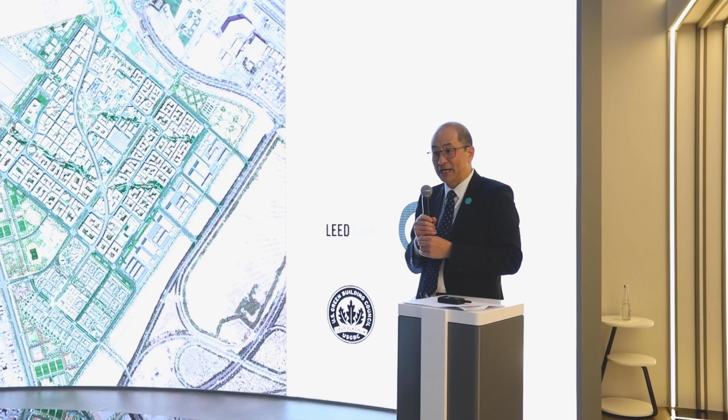City designs are super complex objects, and one can talk about cities in terms of its livability, in terms of its community, a place that is impacting climate change. At the same time, we talk about Masdar City in terms of a business center, clean tech hub, innovation hub, smart centers, all these different things; they all make up what cities are about.

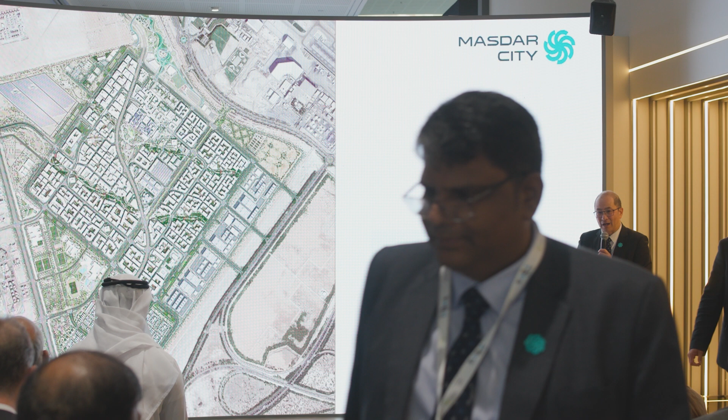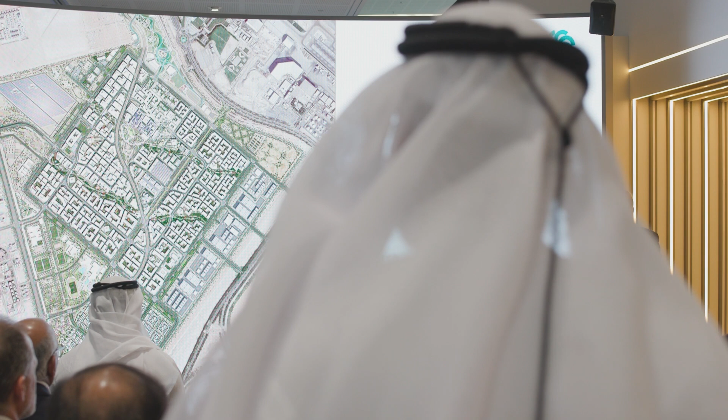Various colleagues earlier today have spoken to many of those points, but this particular presentation is really about one of those dimensions of the city, which is our role in climate mitigation and decarbonization. What I want to do today is go into a deep dive into some of the details, and also talk a little bit more about the way we work and some of our experience, before I go into our actual proposed roadmap to net zero by 2050, and areas where we have succeeded, areas where we are on our way, and areas where we know for sure there are challenges to come.

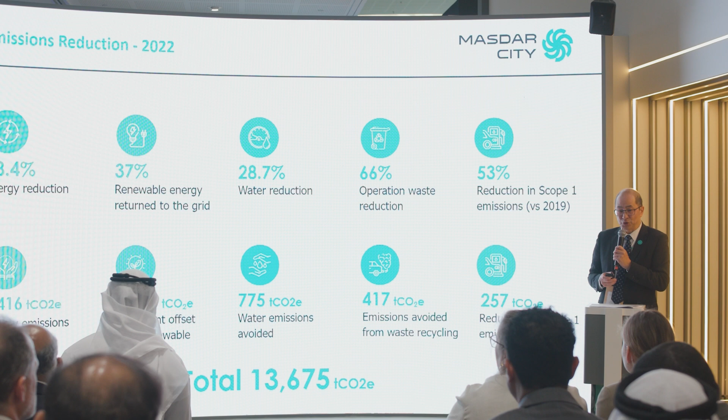So straight into the numbers. This is our actual operational performance figures from 2022. 2023 figures are under preparation. These numbers are available in our ESG report, available on our website for downloading. We run transparent information sharing. Here you see what we're doing with energy, water, and waste mainly.

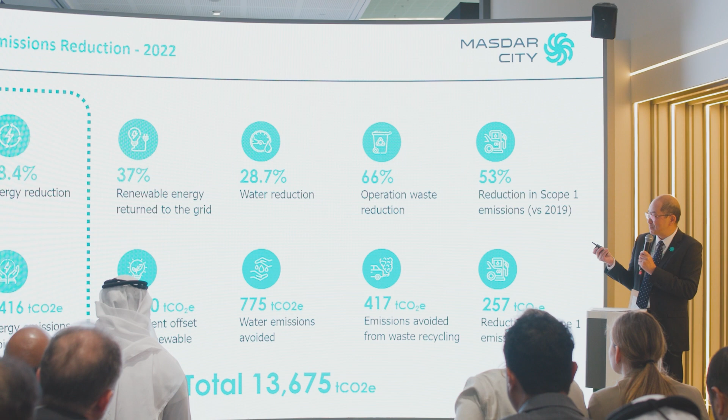But the thing I'd like to highlight is the number related to energy. 7,416 tons is where we have made the most saving. The reverse of that is that it's also where the largest footprint is, and because it's the largest footprint, we can make the most savings. I'm not saying water and waste reduction is not important. All I'm saying is these are the actual measured numbers from Masdar City in these various dimensions.

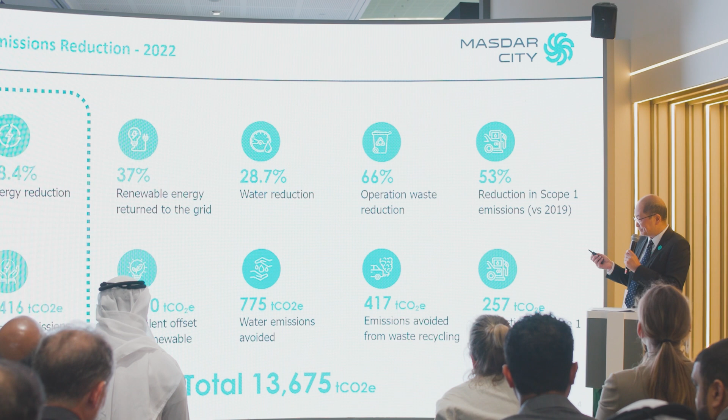What does that energy reduction mean so far? Based on our current portfolio, which is approaching 500,000 square meters of development, we're effectively taking the equivalent of 1,600 large UAE SUV-type cars off the road, just to give you a perspective of what that number means. However, we have a lot of buildings under construction. In fact, we have just finished one net zero energy building, and there's another 12 buildings of high performance under construction, 2 of which are also net zero, which I will show in a moment.

We are in an acceleration stage of development. Before, we were building one building at a time, then we became one project of multiple buildings, and now we're building multiple projects with multiple buildings at the same time. We are really scaling up. With the current construction, you can see that by 2025, our projection is an improved energy reduction and a huge leap in terms of the carbon emissions related to that expanded portfolio.

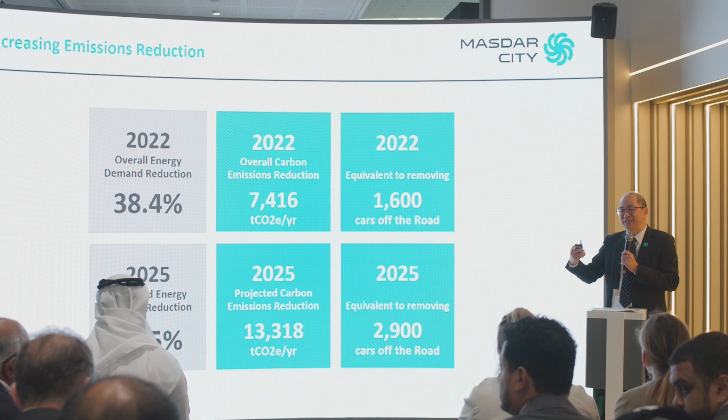The 38 to 45% is a significant number. It doesn't sound like a big number, but the 45% represents our entire portfolio. So you can imagine if you're just adding one net zero energy building, as strong as that building is, you are just lifting up the average of some of our older buildings.

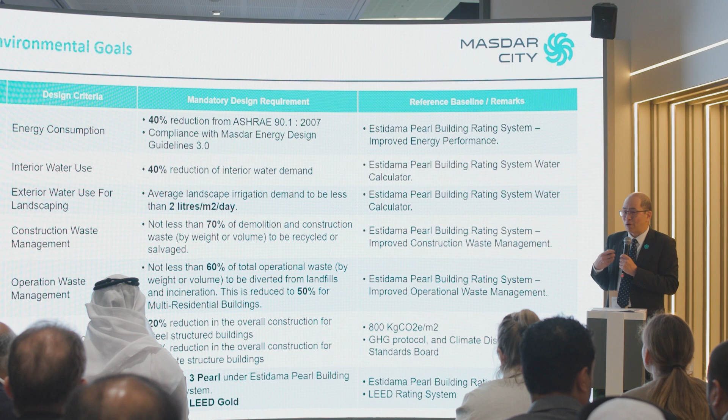Now I'd like to touch on a number of things that are unique, and thank you for being here, because you're not going to find this on any websites. This is a discussion of our approach to design. When you visit Masdar City, you see a large number of buildings. But a large number of buildings is really just the outcome of a process that we have been developing over years of how to build greener.

These are some of the design parameters that we put into our projects in terms of energy, water, waste, and embodied carbon. What's important is not what the actual numbers are; what is important is that you have numbers in the first place. Oftentimes people say, I want to design a greener building, and they design and build it, but because it's such a complex subject, they really don't know if it's greener or not. Oftentimes they improve one thing and something else drops. So you really have to monitor to understand the cross-relational impacts. The numbers are a discipline for us to think about these things, rather than the actual numbers themselves.

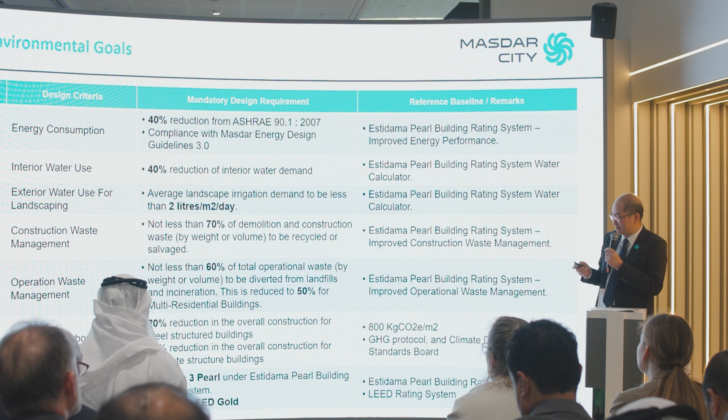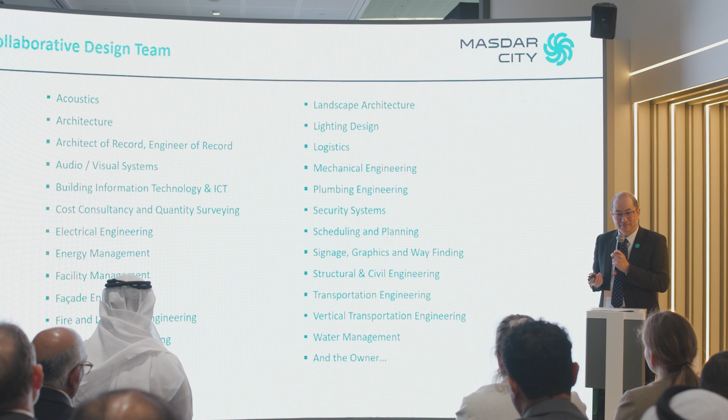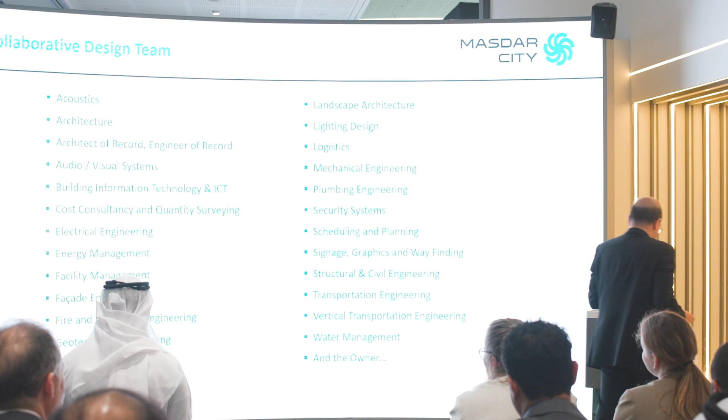So if I had to open up to the audience, which of these disciplines is the most important in the design of a building, excluding the last one here, because I'm the owner representative? Do I have any offers? What do you think? Which one is most important? They all have to be there to contribute to the building, but which one is most important? Scheduling and planning. To start with. Any more offers? No?

Well, the answer to me is a very simple answer. Sorry? Someone said all of them. You're right, they're all important. That's why they're on the screen, because they will have to contribute. But which one is most important? All of them means they're all the same. So the most important one is very simple.

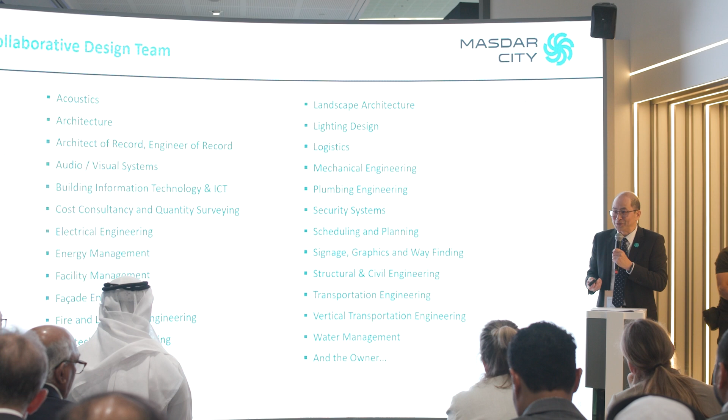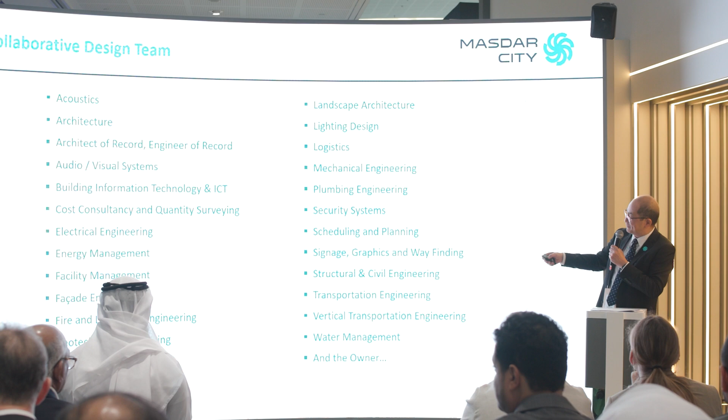It's my one. That's the answer for all of you, because you all believe that your subject is the most important one. It's the one you selected to dedicate your life to, unless it was chosen for you by your parents, which happens in real life sometimes. But in most cases, you choose a subject and you dedicate your life to it, and you're passionate about it. And then suddenly you're in a room with 15 other people who are also very passionate about their subject. And there you have the start of chaos. We're trying to design a building.

And so in order to make a building go green, which actually relies on collaborative and integrated design, you have to figure out how do you get all these people to run in the same direction under a common mission statement. So that is a kind of process challenge that we have to go through.

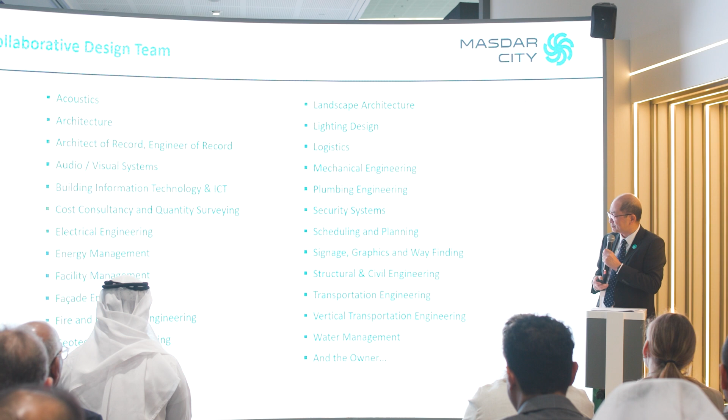The lighting design that you do obviously would change depending on how large your windows are. How large the windows are will determine how much heat you let in, which will impact the air conditioning system, the engineering. Even the shape of the room behind it, even the colors of the walls behind it actually have an impact. But do these people normally talk to each other when they are designing this? No, they don't. And that's what we found as a practical reality.

Yes, they share drawings. Yes, they call them up on a computer. Yes, they overlay them. Yes, we have clash detection software and this kind of thing. But oftentimes they don't talk to each other. This is in the building industry, and I'm sure this happens in other industries as well. So how do you make these people talk to each other in the right way? Well, there was no simple answer to that, but over the years we have been trying out different things.

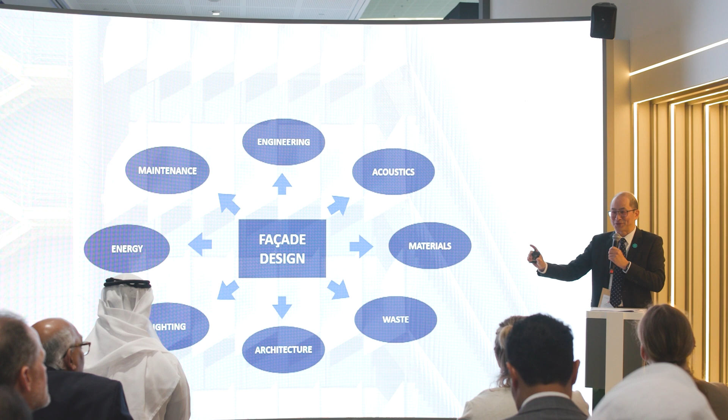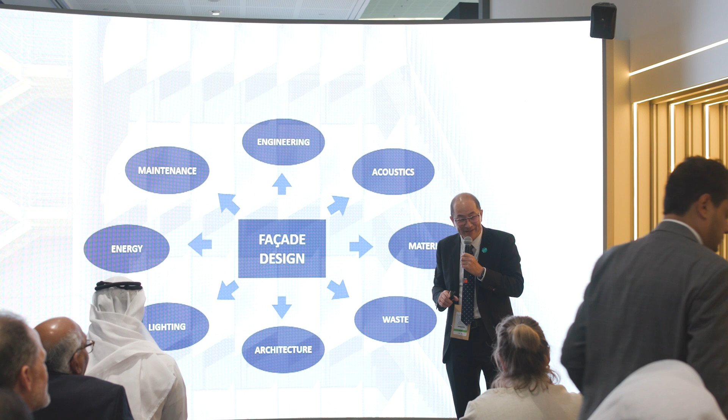The architect protested. We said, you had your chance, just for 2 weeks let the engineer be the architect. So the air conditioning engineer said, me, architect? You mean I can actually move rooms around? I said, well, you're an architect. You can move it all around. Do that. But from an engineering point of view, where would you put your air conditioning rooms?

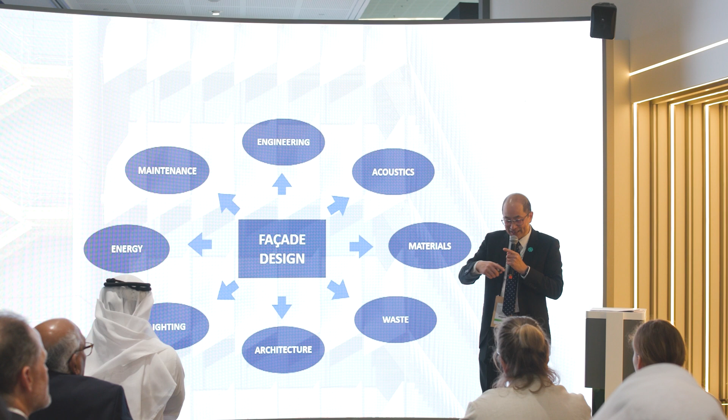He came back 2 weeks later within the same footprint, and the rooms are all rearranged. Very simple. You put the plant in the middle, so it comes up, it goes out. And because you did that, the 1.2 meter ceiling void became 700. It was a half a meter saving per floor across 5 or 6 stories, actually. That's a 3 meter saving, and that entire building came down by 3 meters. That's the whole floor. Right?

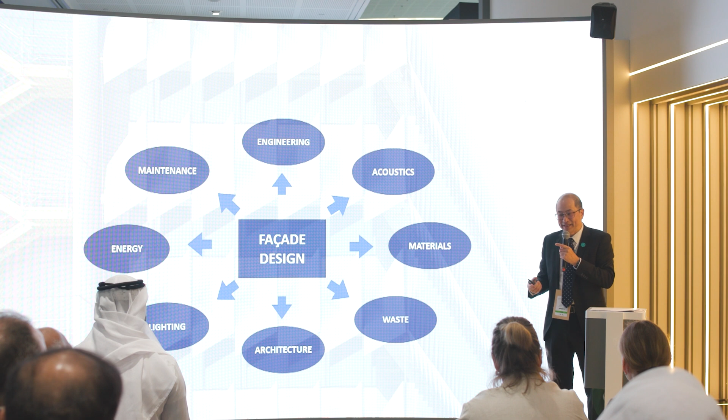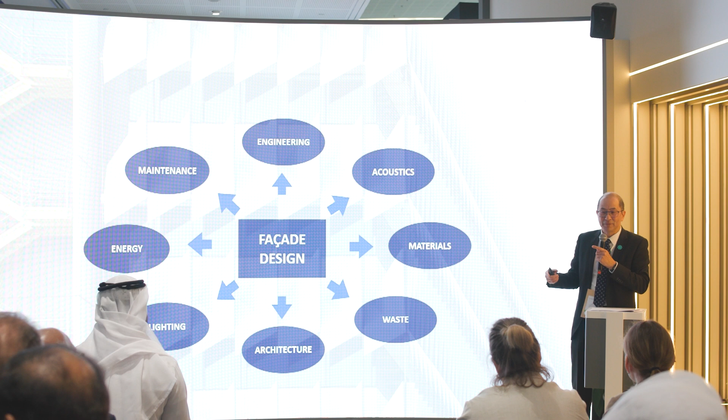As an owner representative, I was extremely happy because we were saving 3 meters of facade all the way around. It was a smaller volume, which actually ended up with less air conditioning. The chilled air had less distance to travel because it was coming through the middle. So efficiency was improved, so it was saving all the way through. So who says sustainability costs money? Done in the right way, it actually can save you money, but it depends on what you are looking for.

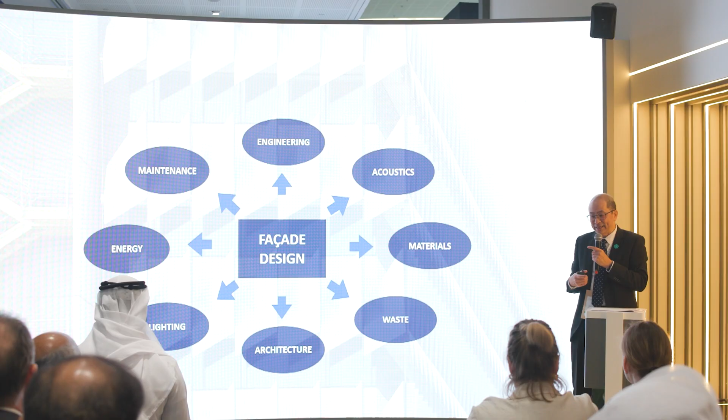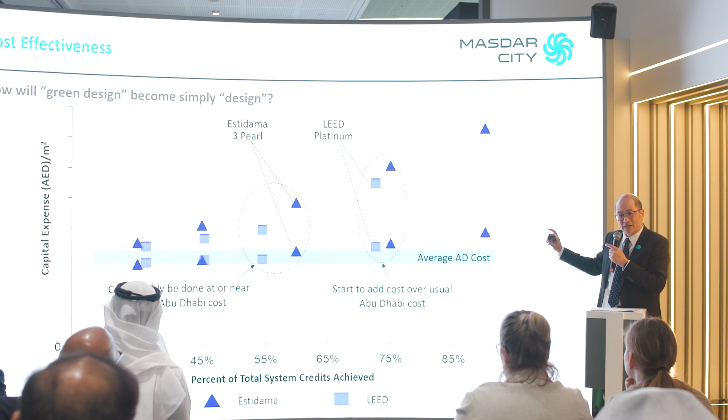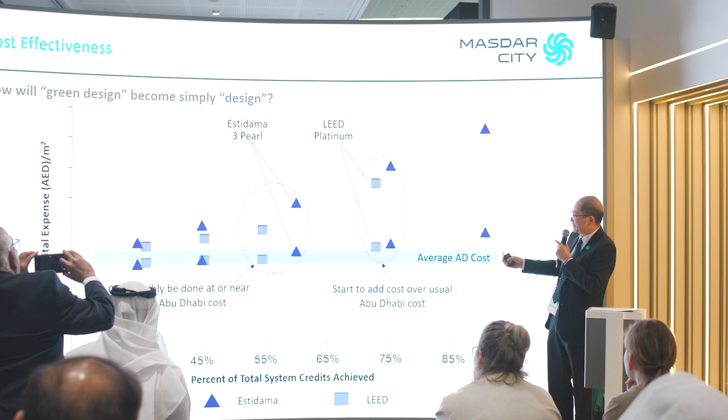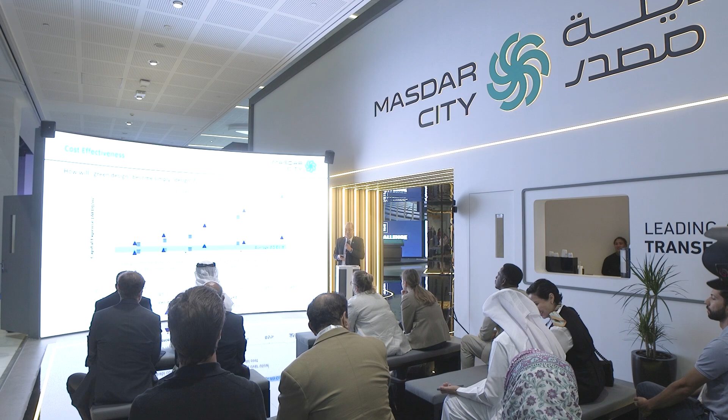Right? Because when you have, let's say, a high-end green-rated building, a LEED platinum, which is the highest rating, and then you find out how much it costs, you're really not sure if the cost is due to more insulation, or you happen to specify Italian marble for all the toilets. You just don't know because the survey doesn't go into that level of depth. And you'll never be able to compare apple to apple anyway. So it's a kind of pointless exercise. But the message is clear.

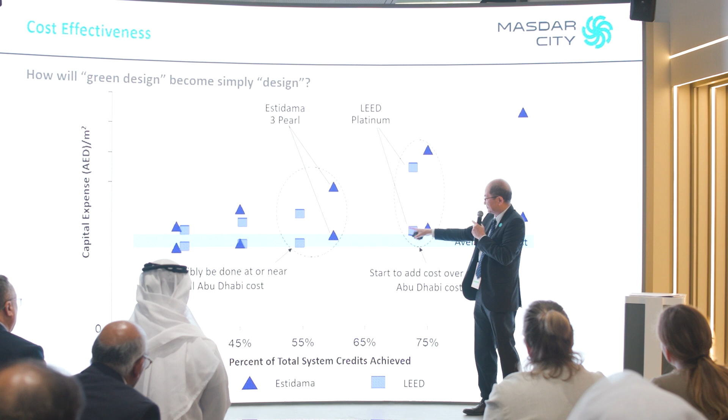What Masdar City is interested in is what happens here, right? And what we found is people who are reaching this point here are working along similar lines to what I was describing before. Finding those things where you have a win-win situation in being environmentally efficient, energy efficient, and at the same time addressing the cost issue. Because I have to say here that Masdar City is a wholly owned subsidiary of the Mubadala investment company. So we are also an investment company. It means that all the projects we do are driven by investment.

It means that complementing the environmental targets, we have specific targets for IRR. We have specific targets for ROIs, right? And we look at payback periods. I know it might sound odd, me being an architect talking about payback periods, but that's what we have to do to turn this into reality. We work in an organization, and I mentioned collaboration, where architects need to understand cost and finance, and cost and finance on the reverse side need to understand something about architecture.

And I think that is one of the big advances that we've made over the years at Masdar City, with this cross culture, cross discipline, where we start off arguing with each other, and after years of exhaustive arguing, we occasionally like each other, right? Because out of that, great solutions are born. No, we actually like each other a lot, actually.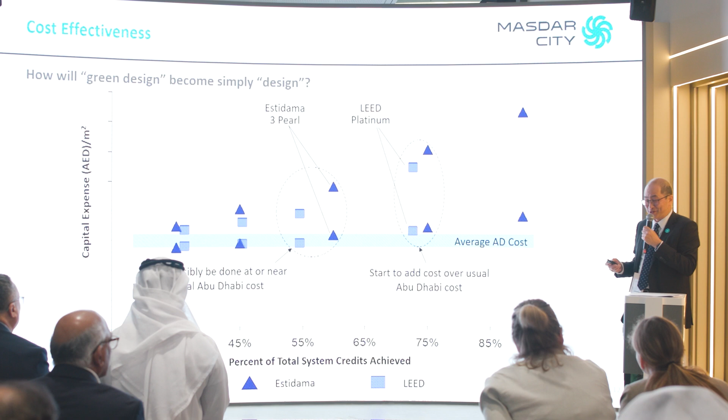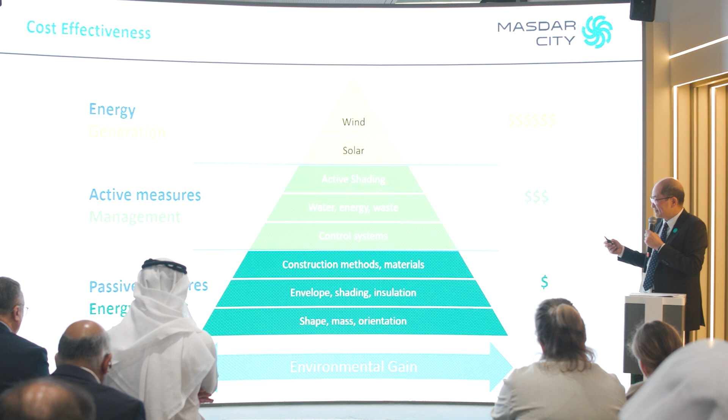And so this diagram, which was presented earlier today by my colleagues, is a summary of this. The environment has to be approached in a certain way. For us, if anyone was here in my previous session, I was talking about maxing out concepts borrowed from traditional design, from passive design, from understanding shapes of buildings, openings and everything, before you actually increase your investment for active management and finally power generation. And when you put all this together, you get certain performance criteria of energy efficiency just based on the passive and active approach before you put on any PV panels, right?

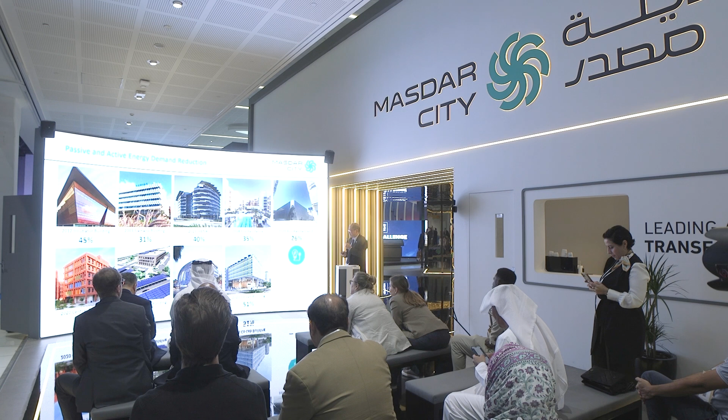So these numbers move up and down a bit, and there's no apologies for that. This is what happens in real life. Buildings get used a different way. Building users, some are more environmentally conscious than others, etc. People forget to close doors, and things get broken. But we are doing our best to optimize the passive design. And we've found that we can achieve up to 50% energy saving just by taking this approach. Now, in the triangle before, I said after you exhaust this, you add the renewable energy.

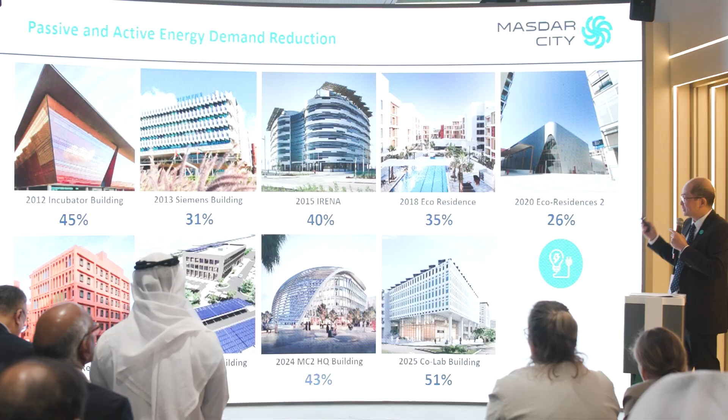And so when you add the renewable energy to this, you can see a very different series of numbers come out. That starts from 0 and ends up at 114 at the bottom. 0 for the 2012 incubator building is because, being an investment company, renewable energy on our buildings was simply unaffordable at the time. We were talking about 40 cents per kilowatt hour. Fast forward into 2023, 2024, 2025, when at-scale solar farms are delivering at less than 2 cents per kilowatt hour, down from 40 cents. It suddenly becomes a viable proposition to introduce PVs.

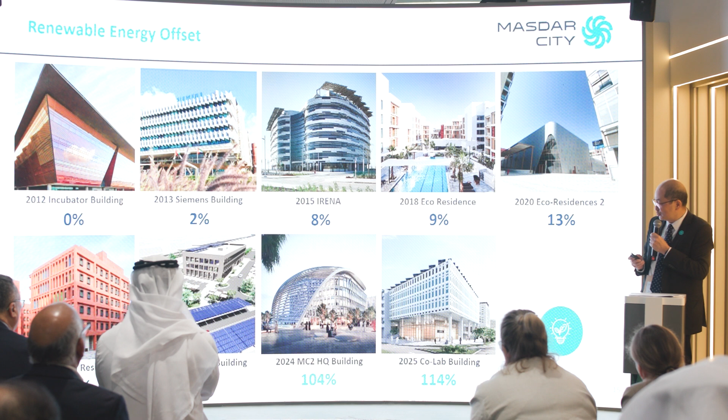So there's been a gradual increase over the years. And when it gets to the bottom 3 buildings, where you're hitting over 100, combining now the previous passive number with the PV numbers, you understand why that's still only 45, and it moves up to over 100. And effectively, those three buildings at the bottom are defined as net zero energy buildings under operation.

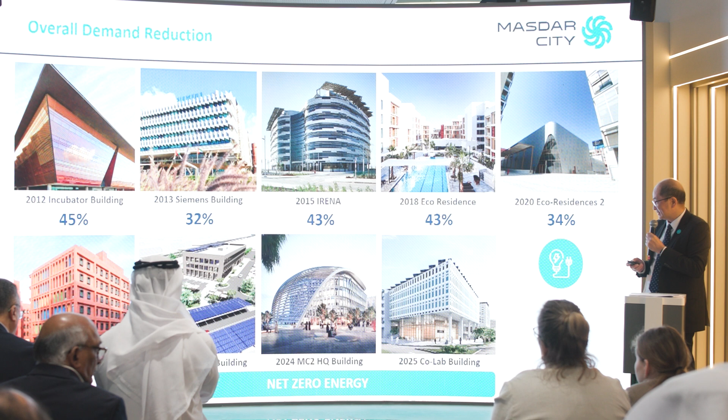This building, this is just a rendering, but we recently completed it. It's a net zero energy building. What does it look like? It looks like a shoebox, right? And we do call it a shoebox. It's as simple as a shoebox because we understand that not every building is meant to be iconic. In fact, a large majority, 90% plus of buildings, are your everyday buildings. Most buildings are just shoeboxes. So we thought we'd design a shoebox, but it just happened to be a net zero energy shoebox. We gave this a tagline, net zero energy for all.

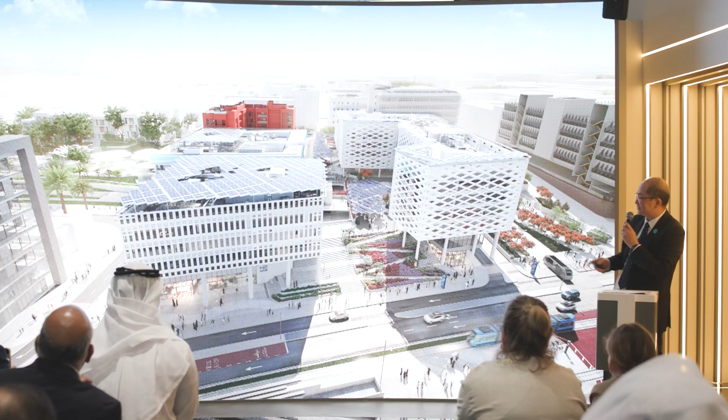And why net zero energy for all? It is to make it as affordable as we can. And remember, I mentioned earlier about trying to get everyone to run in the same direction. So we told the entire integrated design team, net zero energy for all. Every decision you make is net zero energy for all. And that got people to focus on efficiencies and on cost effectiveness. One of which is net zero energy, the bottom right-hand building.

This building, we call it the CoLab building. It's a shared living and shared working building. Half the building is for co-living, half the building is for co-working. The idea behind this is that any mechanical system you have is working very hard on the office side during the day, and during the night, when fewer people are working, it's working very hard on the residential side. So there's a kind of efficiency in that. And on top of that, we made it net zero energy in operation. This one is slated for completion by the end of next year. It's under construction at the moment.

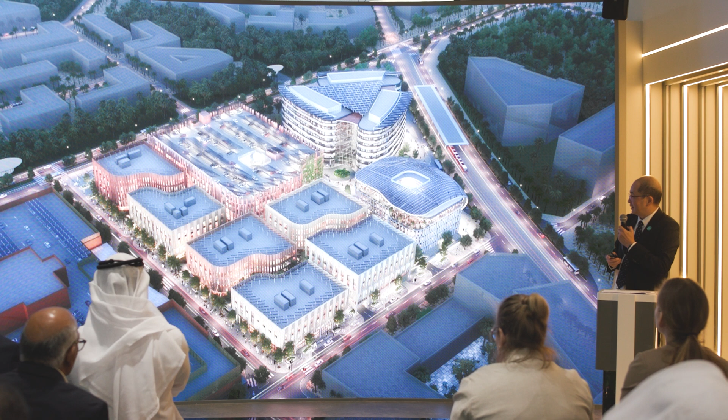Another project under construction, we call this the MC Square, 7 office buildings, of which this one here is also on target for net zero energy, following the same principles I described earlier. What's also interesting about this project is that it's next to an existing building here, the IRENA, International Renewable Energy Agency. They're headquartered in there, and they share the building with the Emirates Nuclear Energy Corporation.

And at COP28, we announced the tenant coming into this net zero energy building. It's the Abu Dhabi Department of Energy, which is quite interesting, a Department of Energy in a zero energy building. And so we have 3 entities related to energy, all within 1 minute walk from each other. Which, to me personally, I see as our contribution to the energy transition conversation. Total encouragement.

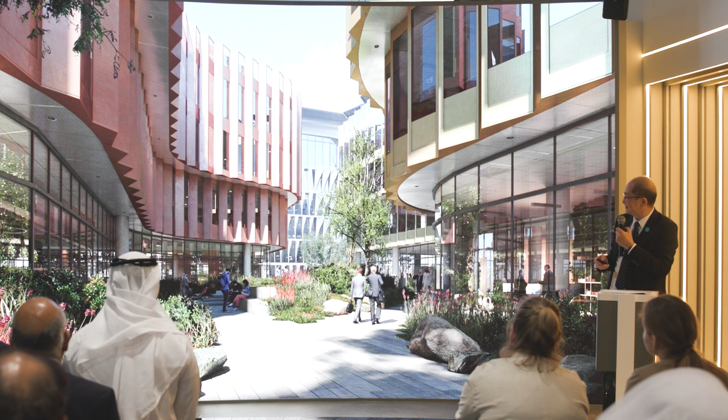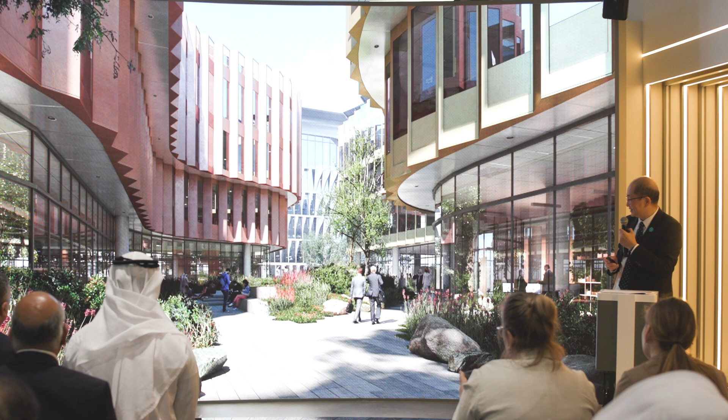There are some details, the walkability of the place, which is a standard feature we optimize throughout Masdar City. A close-up of the headquarter building. We had to really max out how much PV we can put in there. That's why the PV comes down and forms the porte cochere for the whole building. There's no PV on the right because the right-hand side is actually shaded by the IRENA building. So this is a kind of shroud building with a part cut off that's shaded. It's a very simple concept.

And this is a picture of the atrium taken about 3 months ago under construction. And so now transposing the way we work into a proposed way forward to net zero. Currently, the EUI, energy use intensity, or the amount of energy you use per square meter of building, we're running around 145 kilowatt hour per square meter of building. That's operational. We need to get that down to 100 somehow, in order to give us a fighting chance to get to this place here.

When the new projects are completed by 2025, that average is going to move down to 131. So it's going in the right direction. But you do have the challenge of the law of diminishing returns. So the more you push, the harder it gets. But that's what we do. That's our day job, to keep improving and improving and improving.

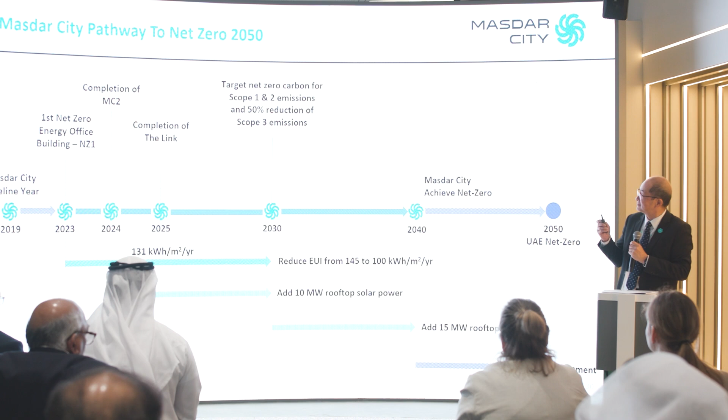Embodied carbon. Do we know what embodied carbon is? Embodied carbon is the emissions from the construction. And in broader terms, actually the emissions from the maintenance of the buildings and any replacement we make, and also, across its full life cycle, emissions from demolition. But we're concentrating on the first part, on the upfront embodied carbon from the construction aspect.

The challenge with embodied carbon is that there is very, very limited data in the entire world. When people say we want to reduce it by X percentage, the next question is X percentage from what? Because there is no recognized baseline. However, there are a number of studies and journals out there that seem to converge on this particular number of what is business as usual. And so we're using this for the time being.

Some people are suggesting that Masdar City can be the baseline, which I think is going to be a tough call because we're using a lot of green materials already. And if you use that as a baseline, it means that your business as usual building becomes negative. So 800 is a good starting point, I believe. And our portfolio across all our buildings at the end of 2022 is averaging 642. Now that's an average because we actually have some early buildings over 1,000, and we have buildings that are around 500.

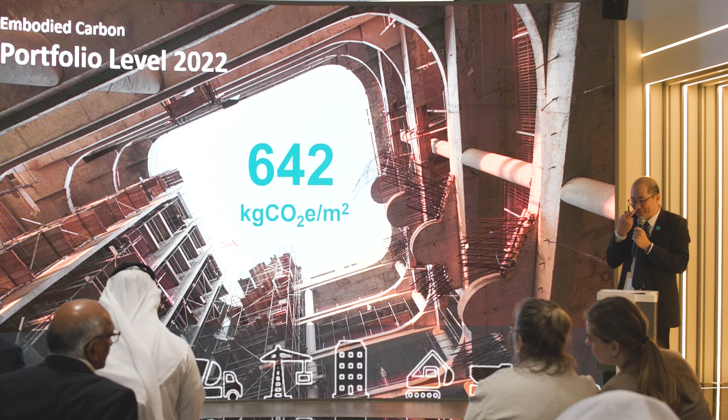The 1,000 building is actually a steel structure building. Steel has a very, very high carbon footprint, at least it had when we were building it back in 2012. And this was the first building, the incubator building you saw there. And so it's not surprising that after that venture, it's our only total steel structure building, because of the impact on carbon. Maybe that's changed in the future. We are engaged with a number of companies who are doing a lot in decarbonizing steel as well.

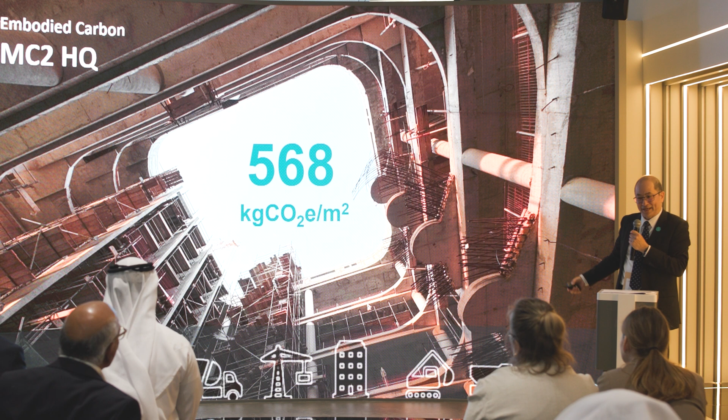This is where we think MC Square HQ is heading for. This is the Shroud building, right, where the Department of Energy will be residing. I think we'll end up being pretty close to this because the contractor is using the majority of materials that we are specifying already.

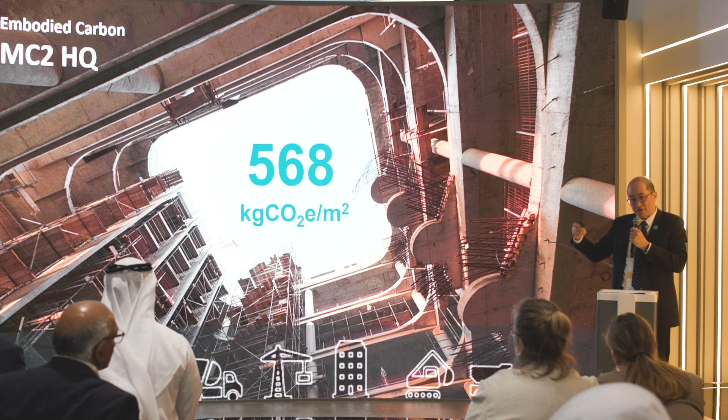The shoebox is lower than the MC Square for one very simple reason: the shoebox has surface parking, whereas the MC Square HQ has basement parking, and you're carrying all this concrete underground. So one has to be careful when one starts going downwards from an embodied carbon point of view. Right?

And then we are trying to get to 50% reduction by 2030, which in our case here is 400. To share some ideas, in our latest design we're targeting somewhere between 450 and 500. Again, the law of diminishing returns tells you it gets harder and harder as you go on.

But whereas we have control of the operational energy and water, it's very difficult to have control of the embodied carbon because you are reliant on other industries: the steel industry, the insulation industry, the concrete industry. And so we're not going to get there unless all these different things converge. But this is, at the end of the day, still work in progress.

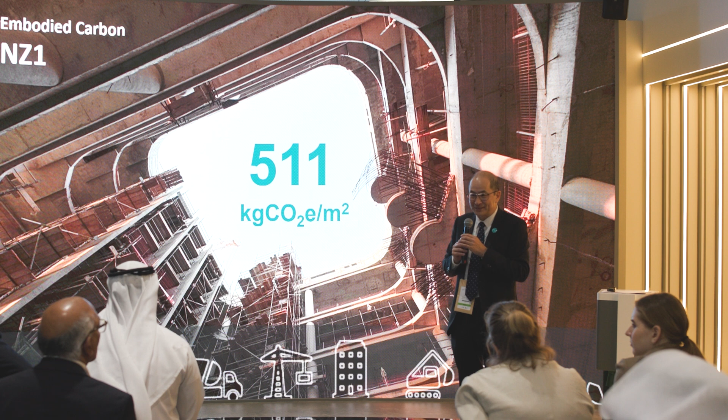In 2008, 2009, around there, we worked with a company from Iceland, and we were wondering if we had geothermal energy at Masdar City. So a drilling rig was brought to Masdar City, and we drilled down 2.5 kilometers. Fortunately, we did not hit oil, because if we did, I think Masdar City would have changed its business strategy there and then, right?

We went down 2.5 kilometers, and we found water that was, from memory, about 120 or 125 degrees Celsius. So it's higher than boiling water because the water's under pressure. Unfortunately, according to engineers, that temperature was not high enough to make it commercially viable at the time. So the well was abandoned.

Fast forward to last year, that well is being reused now by Tabreed. They're not going down that deep, but they are tapping a certain level of geothermal energy and introducing that into a district cooling plant serving Masdar City. So that plant has a 10% contribution from geothermal in its energy mix. That's all we've done so far on geothermal.

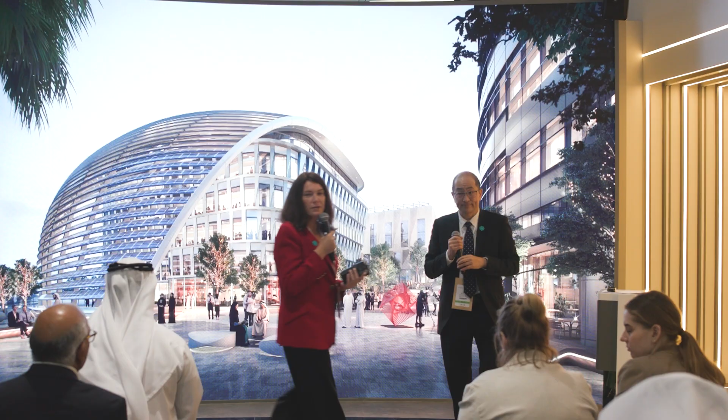Who has the next question? No? Oh, there is. And how do you calculate the scope 3 emissions?

Scope 3 emissions essentially cover any emission caused by you that's not scope 1 and 2, right? So backtrack. Scope 1 emission is CO2 emitted from the site, like if you burn a diesel engine. Scope 2 is purchased energy, usually purchased electricity or purchased cooling. Scope 3 is everything else, from business travel to purchasing goods and materials to, in our case, construction.

So scope 3, for those who've been in this area, has 15 categories. That makes it really, really complex. It's really broken down. For example, business travel is one category of scope 3. Investments is another category. Buying stationery fits in another category. But I think you're talking about scope 3 as it relates to embodied carbon.

In that area, the way we measure it is that there are certain databases in this world that give the embodied carbon emissions for different materials, be it concrete or steel or insulation or glass. We take this data and collect the volume of materials from the bill of quantities, and if you multiply that through, you get a number.